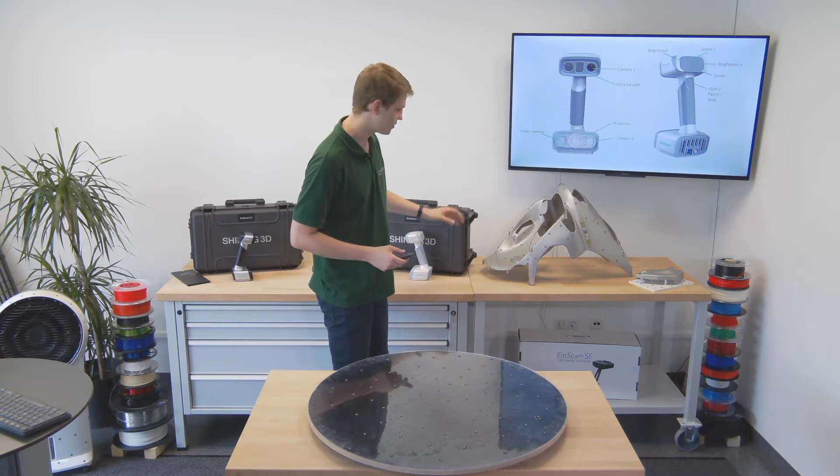So to begin with, I've got a bit of an overview. We'll be starting with the Einscan H, and later on we'll look at the Einscan HX. Starting off with the Einscan H, you can see it's tiny and handheld, fits well into your hand. It's about 700 grams in weight, so not very heavy at all.

It's got all these little windows here. As you can see behind me, it has two different cameras, one at the top, one at the bottom, and two different light sources. At the top, there's an infrared light source, and at the bottom, there is a structured light projector. That's basically the key component of this handheld scanner. It is a hybrid scanner that can use both invisible infrared light or visible structured light from an LED projector.

It also has a color camera, so it is able to capture the color and surface texture of your object.

On the back of the scanner, you can see a couple of buttons. There's a start, pause, stop button to control the scan while you're scanning. There's also a zoom button, zoom in and out, and a brightness up or down button. This lets you manipulate your scanning without having to go back to the computer every time you want to change a tiny little thing.

Now, why is it so important that you have both the invisible infrared and the visible structured light? That's actually because of the purpose for which you could use the scanner. This scanner has three different scan modes: a standard scan, a body scan, and a face scan.

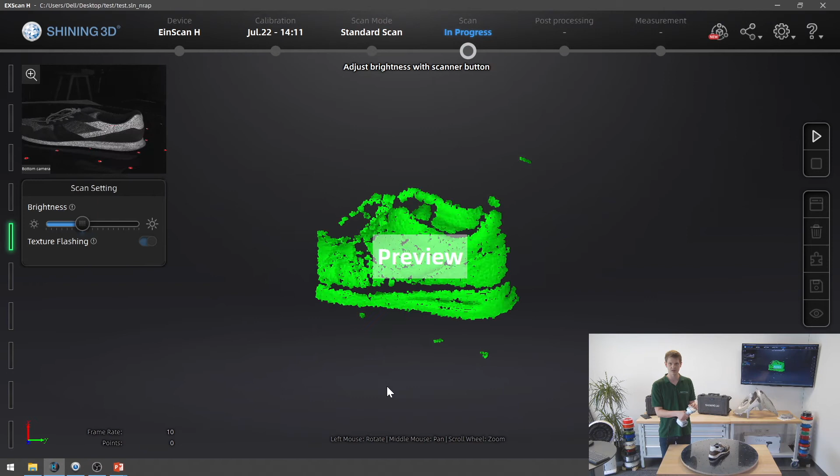You can see that's already where my shoe is, and using the brightness button on the back of the scanner, I can adjust the brightness a little bit. In this preview window, if I have the brightness very high, I have a lot of red areas. Red is overexposed, that's not what you want. So I lower the brightness a little bit. Just about here sounds fine, it seems fine. And then I'm going to start scanning.

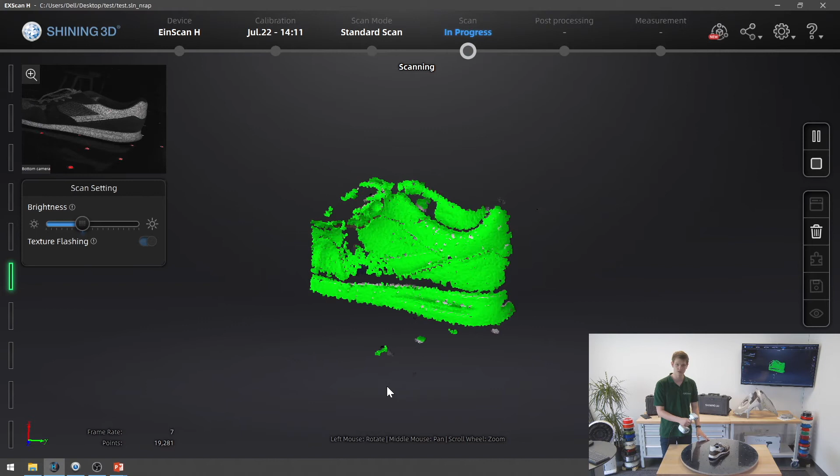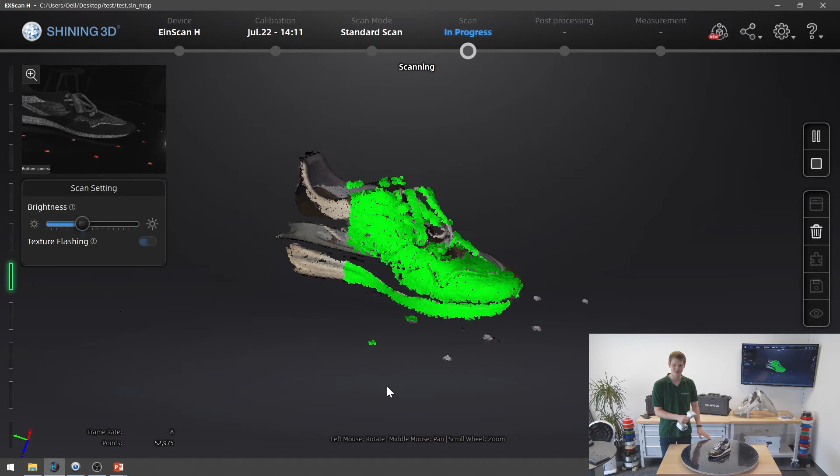We'll see how well this works now. It's always a bit interesting to do these things live, where you're not sure how well the result will work. But it looks like it works quite well. This turntable here is quite nice, so I don't have to walk in front of the camera. Instead, I can just stand here and rotate it slowly once in a circle, letting me pick up the entirety of the model.

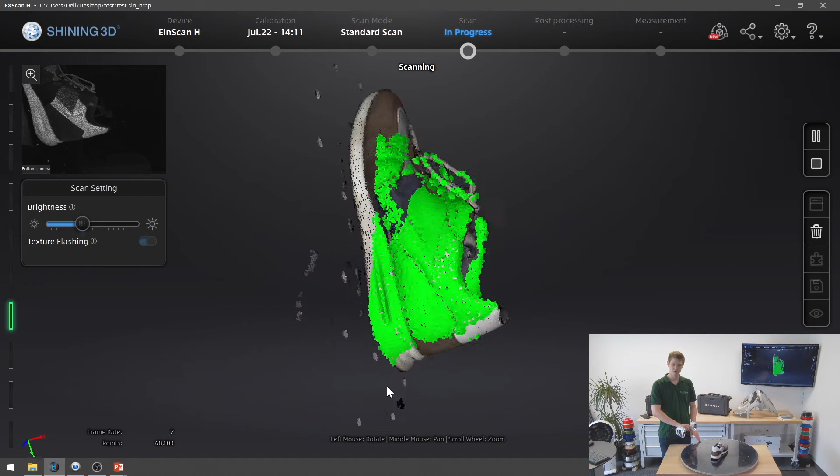So just like that, now I've gone around once. I'll tilt the scanner and really try to get everything here, all the different areas. There we go, once more for the other side as well. Capture everything. And then we can have a first look at what this has done.

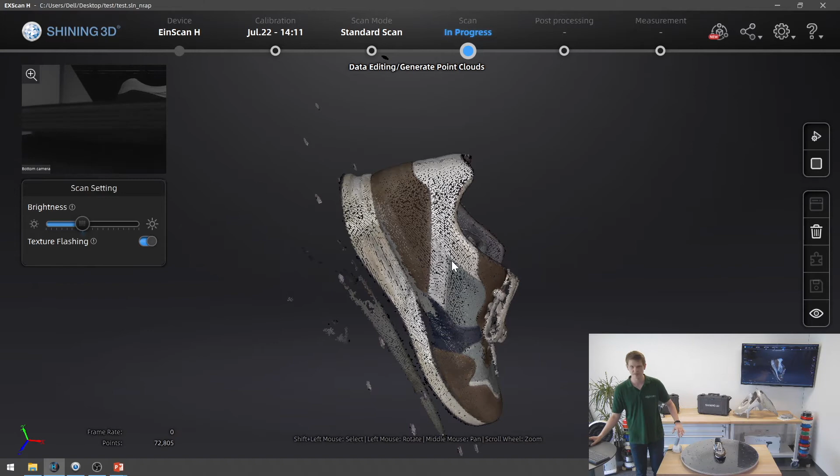So I just press the pause button on the back again, and it'll stop scanning for the time being. Now I can see it's actually picked up most of my leather right here. It didn't do that yesterday, so I must have adjusted the brightness a bit better. Especially down here, there's still a hole.

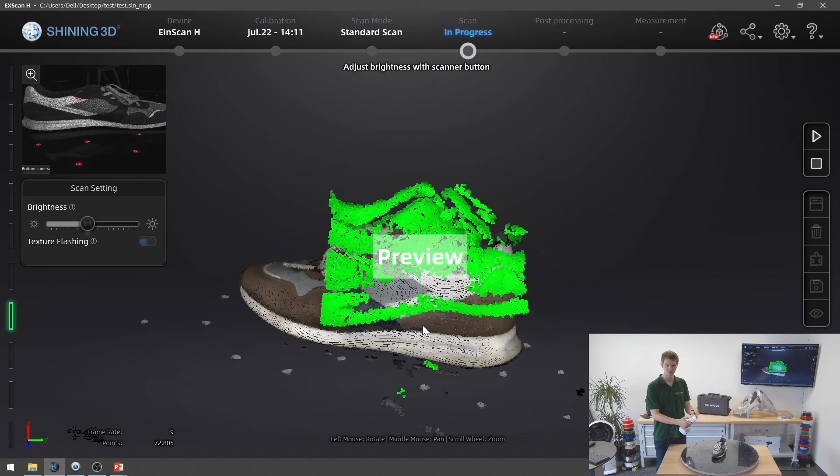So what I can do is I'll start again, and then I'll turn the brightness up high to the point where... oh come on, it has to align properly. And it really doesn't want to. It's not finding its alignment right now. I don't want to start scanning and overwrite what we did before, but I guess I'll just do that, see whether it really... there we go, now it's aligned.

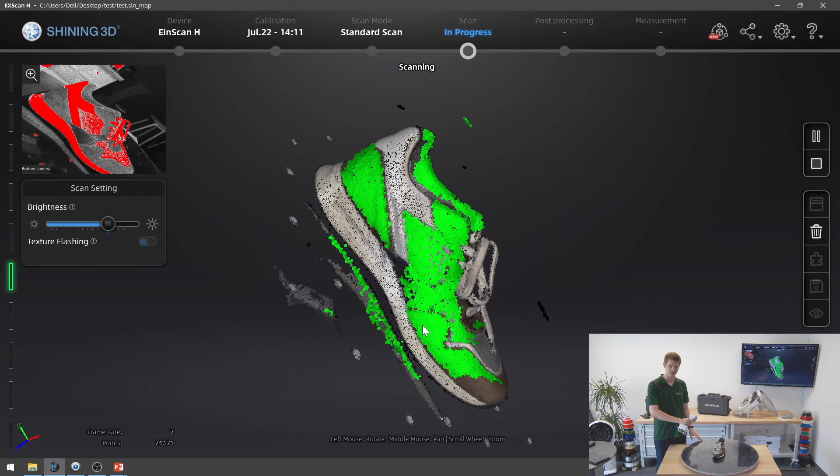Now I'll turn up the brightness so the white areas are completely overexposed, but as you can see, the darker areas of the shoe are still being picked up. And now if I rotate, this will be much, much better to actually pick up these dark and reflective areas. This does mean that the tracking is considerably more difficult because it can't see the white areas, so the scanner is wondering where its tracking went, but that looks good.

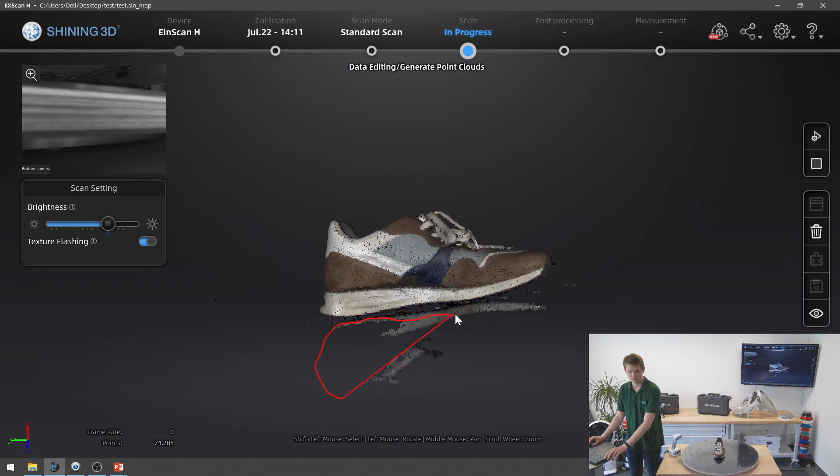And that way I could pick up a bit more of this leather side. Now, of course, I do have some areas that I scanned that I don't want. So using Shift and the mouse, I could select all of this and then delete it, then move on. I could do this a bit more detailed if I really wanted to, but for the purpose of this demonstration, I think this is totally fine.

And I'm going to let it generate a point cloud out of this and then do an unwatertight mesh, so I don't want to fill the holes. Now, of course, if I wanted more details, if I wanted the sole of the shoe as well, I could still do that. I could continue scanning this model in different orientations. I could put it down this way, really pick up all the different areas of my shoe and get into every nook and cranny depending on how detailed I need my model to be. But I think for the purpose of the demonstration, this is already fine. It shows how well the texture is actually picked up by the scanner.

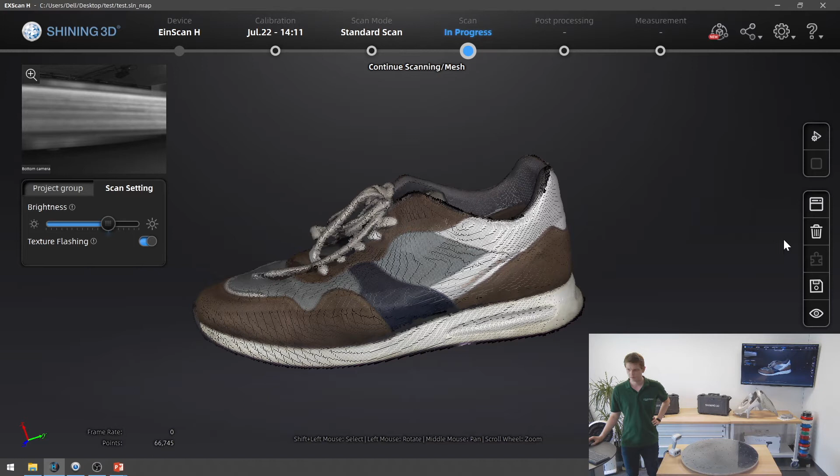And as I said, the accuracy is still very, very good. I hope I'm not too choppy while the software is calculating, that is always, of course, the difficulty. And now this is the point cloud, which actually looks pretty good. So I'm going to make a mesh out of that, and I want an unwatertight model.

And I think it's fairly obvious how you can use this for prototyping, for a variety of applications where this type of scanning can be very, very useful, where you do need to pick up the colors, where you just want a quick scan. And the Einscan H is fairly cheap compared to the Einscan HX or other, I'll call them higher class solutions, such as the FreeScan UE or something like that.

So we can have a look now, and you can really just see how nice this slightly reflective fake leather is. Everything else looks good. Obviously, I have a lot of holes in here, as I said. If I wanted this model to be complete, I would have to rotate the shoe. I would have to do a bit more work. But you can even see the structure of this mesh type thing right there.

You can see how dirty the shoes are. So it picks up just about everything. The writing on the side is quite legible and clear. So the result is really quite surprising and very, very good using this scanner.

Now, of course, as I mentioned, the scanner is also specifically designed to be able to scan body parts or even face and hair. So if that's something that you want to do, the Einscan H is specifically what you would look for. Now, where does the Einscan H struggle?

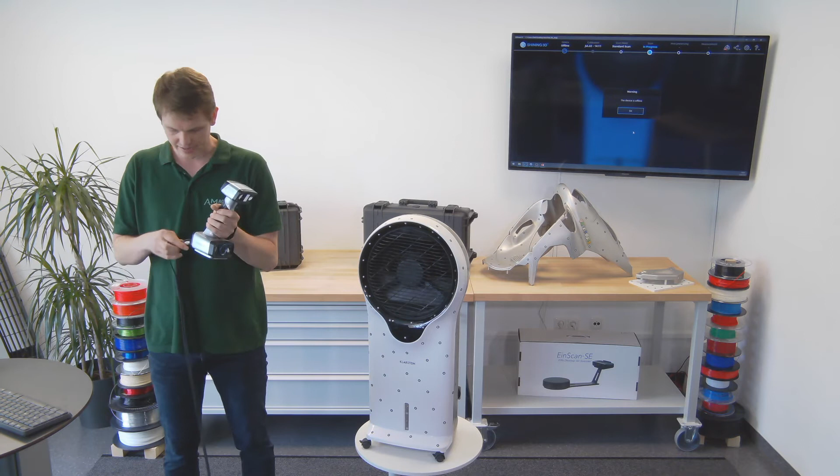Now, what is the Einscan HX? Well, the Einscan HX is also a hybrid 3D scanner, also handheld, also about 700 grams, but there's a key difference. Instead of infrared light at the top, there is now a laser. It's a blue light laser, and it can project 14 laser lines, so you have 7 blue light laser crosses, if I have it correct in my head. We'll see in a minute. And these blue light laser lines are way, way better than the structured LED light at picking up black or reflective surfaces. Also, it is considerably more accurate. So first I'll make this big for just a second so you can see how this one is set up. And I think it's basically the same scanner just with a slightly different setup, considering there's no infrared and instead now there's laser light.

Then, of course, you're looking at the 2 modes. So no longer are there 3 modes, but there are 2 modes. There's laser scan and rapid scan when using the Einscan HX. And the light source obviously changes between the laser light and the LED light. You can see that the accuracy is even higher using the blue light lasers, and the resolution can be turned up to the absolute maximum.

Disadvantage of the laser scanner, of course, there has to be a caveat. You can only align via markers, which is why, if you already looked at this, I have a bunch of markers plastered all over this ventilator just to demonstrate the difference. And it's a bit slower, so it can only pick up about 480,000 points per second, as opposed to the over 1 million points per second that the rapid scan mode can do.

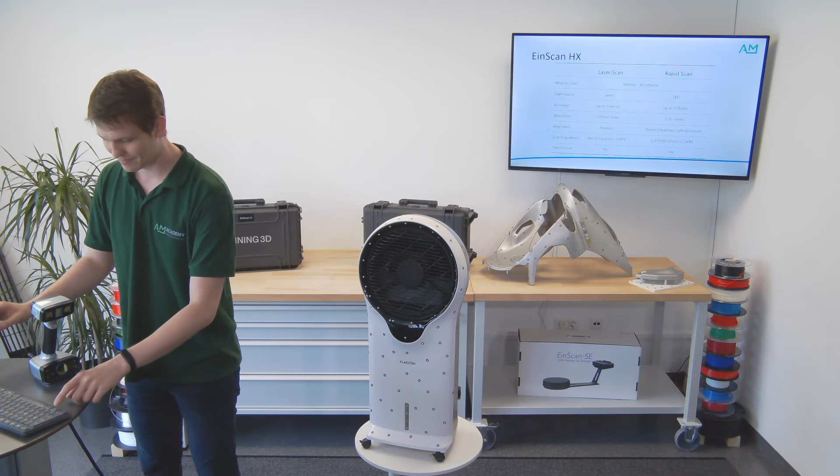And I need to start the different scan software, because obviously the Einscan H software is no longer suited.

No. Come on. Where's the... there it is. So it'll start the software now, and then I can actually use the scanner once again. First time use, it should be calibrated. I've already done that. But we can just get right into this one now.

So there's a higher accuracy using the blue light laser. You also have the visible LED light for any normal objects that are not reflective or that are, you know, the same as my shoe. Because one more difference between the two, and that was visible at the very bottom here, is that the blue light laser scan is not capable of picking up textures. So if you want a texture scan, you have to go for the rapid mode.

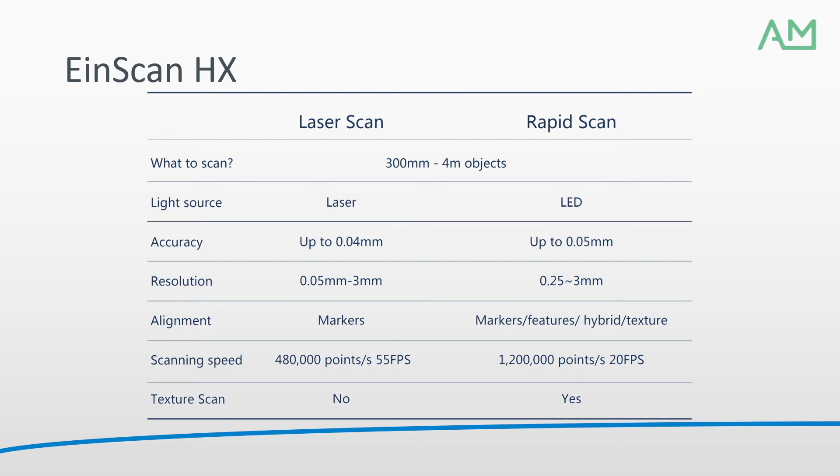So, and now, as you should be able to see, there are 2 different scan modes using the Einscan HX. There's a rapid scan and a laser scan. Now, the rapid scan is just about the same thing we had before. It uses the structured LED light. You can align via markers or via features. It can have the texture scan, so you can pick up the surface of your part.

I could do the shoe again, basically, now, if I really wanted to. I'll just get into the menu real quick, so I can show all these different options right here. So I can have the texture scan, align by texture, or hybrid, or markers, whatever I want. I can have a considerably higher detail than before if I really want to. But as I mentioned, especially for a model like this, there's no point setting the resolution to 0.05 millimeters or something like that. That is just ridiculous. It'll result in a bad scanning experience and not yield any additional use.

So instead, you know, I would do a non-texture scan, scan this thing using the visible LED light. I would have the same issue that I did with the Einscan H. I can't pick up the black and reflective surfaces. So instead, what we're going to do is we're actually not going to do a rapid scan because, well, we've already seen what that looks like. Instead, we're going to do a laser scan.

So that's going to start up. New project group, overwrite my test folder. As per usual, yes, I really do want to overwrite it.

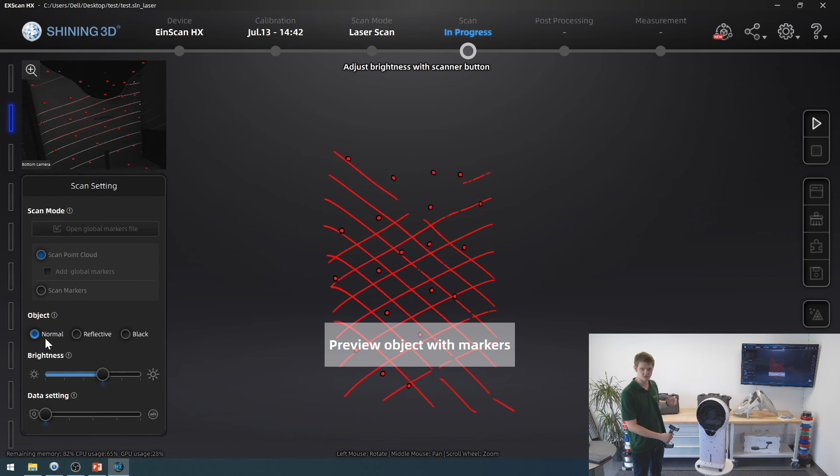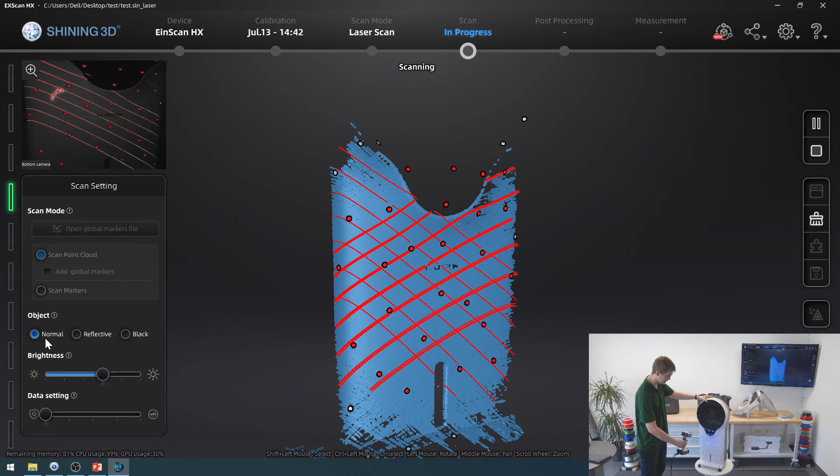So starting off with normal, if I press my play button again, I'll have my preview, and you can see the blue light laser in the preview window top left, how they're alternating, and in the preview they're just static. You can see all these blue light laser lines with crosses that actually pick up my model as soon as I start the scan now. And picking that up, it'll only fill out where the scan lines are, so what you want to do is kind of wiggle the scanner around a bit. You can see how all my markers help it orient, picking up all these little silver dots.

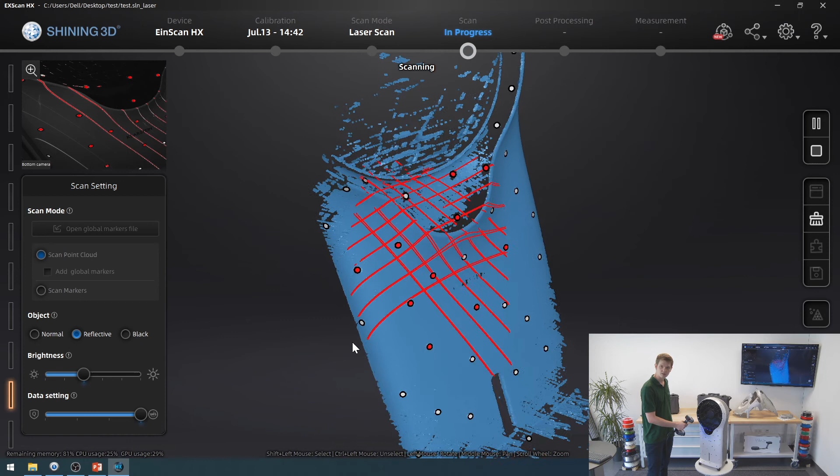But you can see that right now it's having some difficulty with the black areas. It picked some of it up, but not all. So what if I set it to reflective and then just start scanning once again? It's already picked it up. And now, if I just go back and forth a bit, voila, we actually have a proper scan, including the areas that were exceedingly difficult to pick up before.

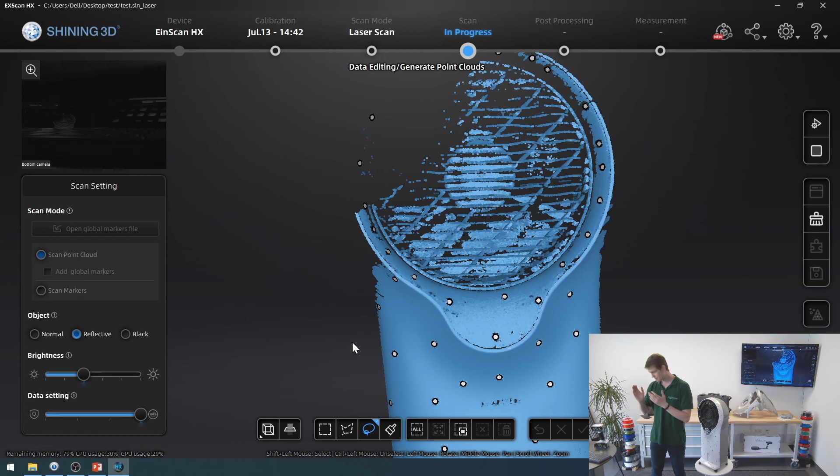So that right there is the big advantage of the blue light laser scan. It can get black surfaces, it can get reflective surfaces, eliminating the need for scanning spray, at least for models like this. If you have something like chrome that's really just a mirror, or glass, that's something where even the Einscan HX will struggle. But as long as it's not glass and not a mirror, everything should be totally fine.

Great, so that's basically the base level comparison between these two scanners: infrared and visible LED light for the Einscan H, laser light and visible LED light for the HX. Each one has some things the other cannot do. The H is well suited for scanning face and hair, while the HX is suited for scanning black or reflective surfaces. So if you're scanning humans a lot, doing orthesis for wrists, knees, whatever, the Einscan H is your best friend. If you're more into quality assurance in manufacturing, you might want to have a look at the Einscan HX. There's obviously a price difference between the two.

The HX is considerably more expensive just because the laser light requires a lot more - it's more demanding, technically speaking. And then, of course, the accuracy is a bit higher as well. But for everyday needs, just scanning a model like my shoe or anything else that might be around, the Einscan H is probably already a very good value proposition.